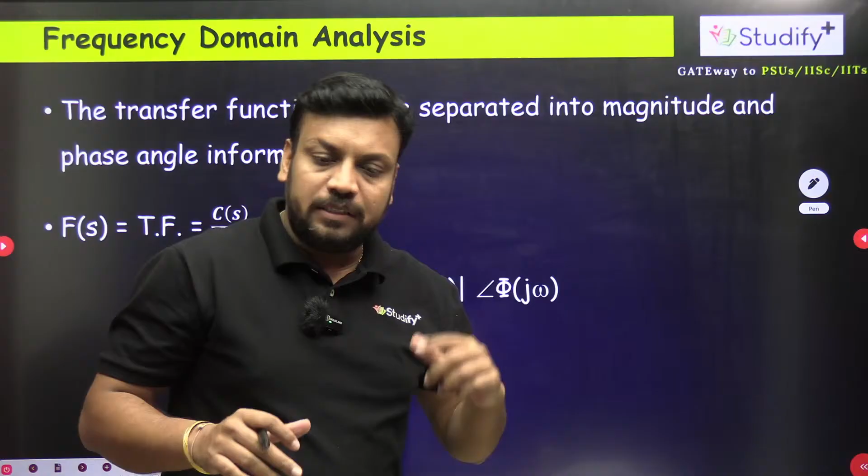So guys, let's start today's class. First of all, tell me if you attended the last class. Just let me know. What was the last slide of last class, guys?

Okay, I think all these questions we already completed. You can just confirm which was the last slide of last class. In the last class we had a discussion on resonant peak and resonant frequency, bandwidth, cutoff frequency. So all these slides we already completed till the last class. I think we solved this, this was the last question of the last slide, the last slide of the last class.

Okay, so today's class we are going to start with this GATE problem, not even engineering services, IES problem.

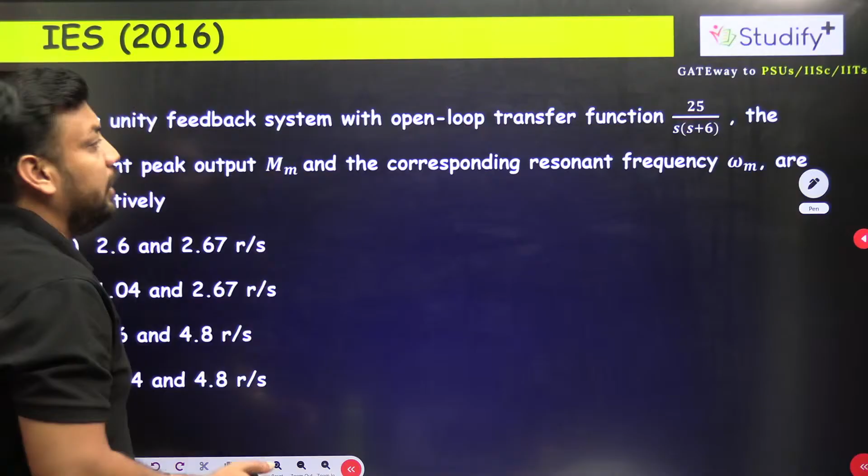And we have solved many GATE problems in yesterday's class. Now student, we derived the resonant peak and resonant frequency formula first in yesterday's class, and after that we solved some problems also. So this question is also based on the same concept.

A unity negative feedback system, it means here H of s equal to 1, and the transfer function is this. The examiner is asking for resonant peak, actually it is Mr, okay, typing error here, and this is omega r, not omega m, respectively. It means a simple formula based question, a straightforward question. The examiner is directly asking for omega r and Mr only.

So first of all, can we write the characteristic equation? The characteristic equation we can easily write because of the unity feedback system. The actual characteristic equation is 1 plus G of s H of s equal to 0. This is the actual characteristic equation.

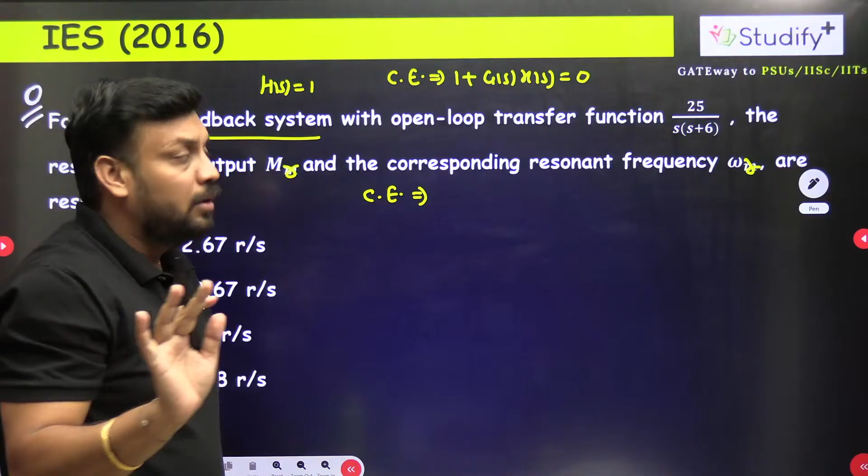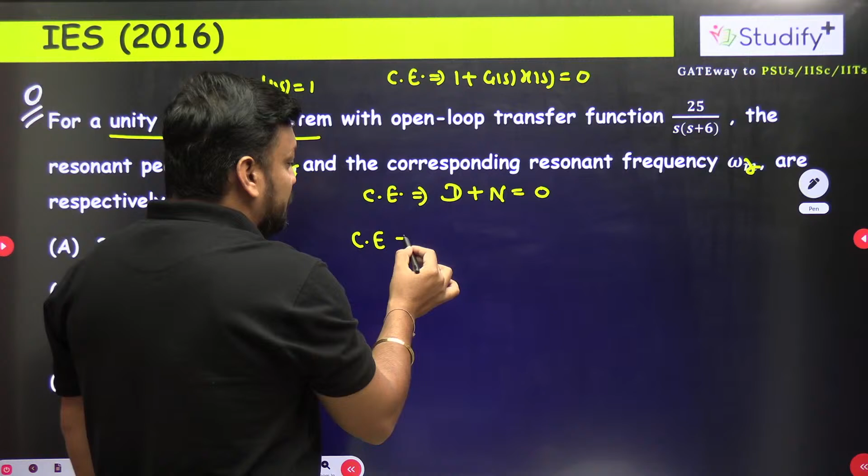But whenever we have a unity feedback, we have an advantage, and we can directly write D plus N equal to 0. Tell me guys, once you do D plus N, don't you think you will get s square plus 6s plus 25 equal to 0? Yes or no, guys?

And if you compare with the standard equation, which is nothing but s square plus twice zeta omega n s plus omega n square, once you compare with the standard equation, don't you think you will get omega n value 5 only? After comparing these two equations, you should write twice zeta omega n equal to the 2 coefficient here, the s coefficient is 6.

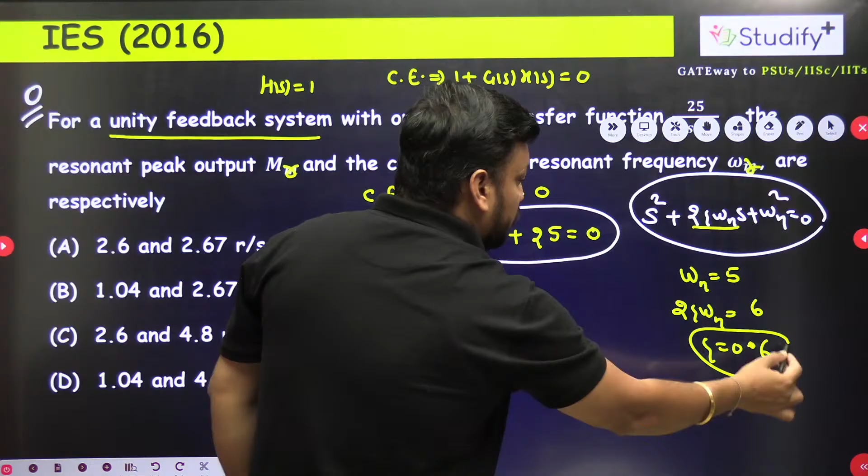Substitute the value of omega n, 5, to get 10. So don't you think zeta value is 0.6 only? Zeta value is 6 by 10, 6 by 10, sir.

Now we have omega n also, now we have zeta also. And do you know the MR formula? What is the MR formula, guys?

So here when you will write the overall closed loop transfer function, tell me Mithun, if I write closed loop transfer function as N upon D plus N, should I get 25 upon s square plus 6s plus 25?

Tell me Mithun, other students should also reply. What is the DC gain of this CLTF? DC gain of CLTF is 1 only.

It means the resonant peak formula shall be written as 1 upon twice zeta root of 1 minus zeta square. This is the only MR formula we need to apply here, and we already have zeta value. So once you put it in, you will get MR equal to 1 upon twice into zeta, zeta is 0.6, under root of 1 minus 0.6 whole square.

Just do some calculation, guys. I think once you calculate, you should get MR near to 1.04. Can you please confirm after calculation you are getting this or not? Just use the calculator, square it, then take the root, multiply with 0.6 and 2. Tell me what is the final answer. I think 1.04 something you will get.

It means two options we can eliminate here, A and C, either B correct or D correct. First confirm this, are you getting MR or not? Then after that we'll find omega R also.

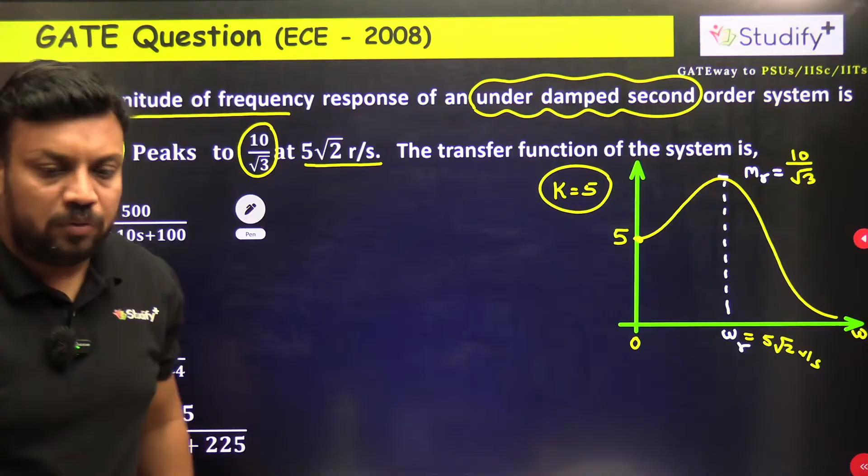And because of this, your MR formula is what? Your MR formula in general is 1 upon twice zeta root of 1 minus zeta square. This formula is only valid if provided K value is 1. But this time K value is 5. So the formula should look like this. So MR formula for this particular question will be 5 upon twice zeta root of 1 minus zeta square.

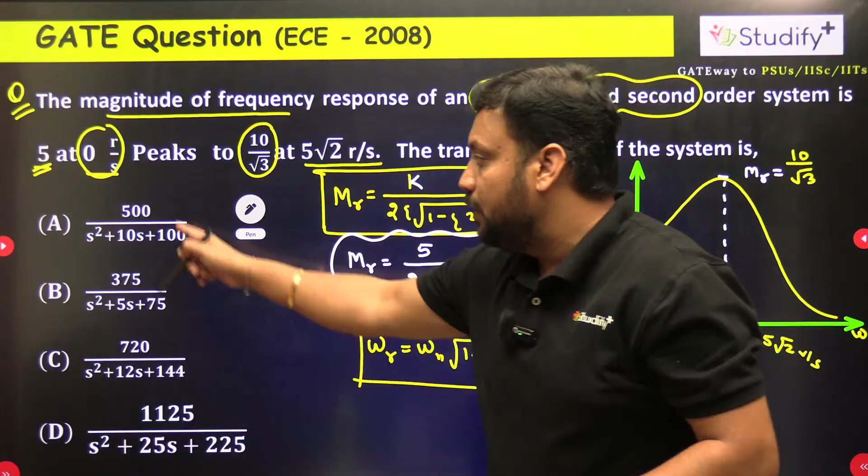Now students, we need to choose one option out of 4 which satisfies MR and omega R value, because by observing the options we can easily compare zeta and omega n. We can compare this with the standard transfer function to find zeta and omega n, and for which option zeta and omega n satisfy the MR and omega R value which is given to us: 10/√3, 5√2, that particular option is correct.

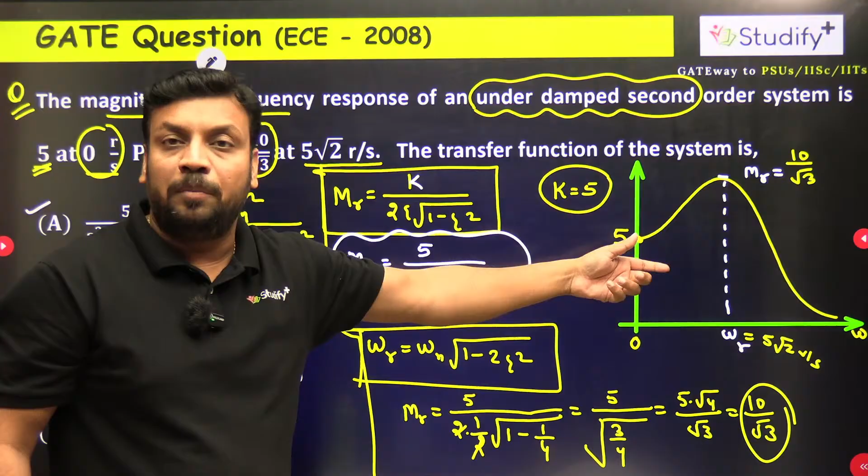So far we have only checked MR. By the way, these zeta and omega n values gave us 10/√3 as MR. It means when I compare zeta and omega n values with option A, and if I put this value in the formula, I get exactly the MR which is given to us. It means option A satisfies MR. If option A also satisfies omega R, then for sure option A is correct only.

Is it clear? Now let me check omega R also. I will use the next slide for omega R calculation. So omega R value is nothing but omega n times root of 1 minus twice zeta square.

Do you know what is omega n? Omega n is 10, and root of 1 minus twice zeta square, where zeta is 1/2, so zeta square is 1/4. So omega R is 10 into root of 1 minus 2 into 1/4, which gives 1/2. So 1 minus half is half only. So we write 10 into root of half. If I multiply and divide by root 2, it becomes 10 upon root 2 into root 2, which gives 10 divided by root 2, so it will be 5 root 2.

Is this 5 root 2 correct, guys? So omega R value is nothing but 5 root 2. Because by comparing option A, we got some zeta value and some omega n value, and by using those zeta and omega n values, we are getting exactly MR and omega R same as given by the examiner.

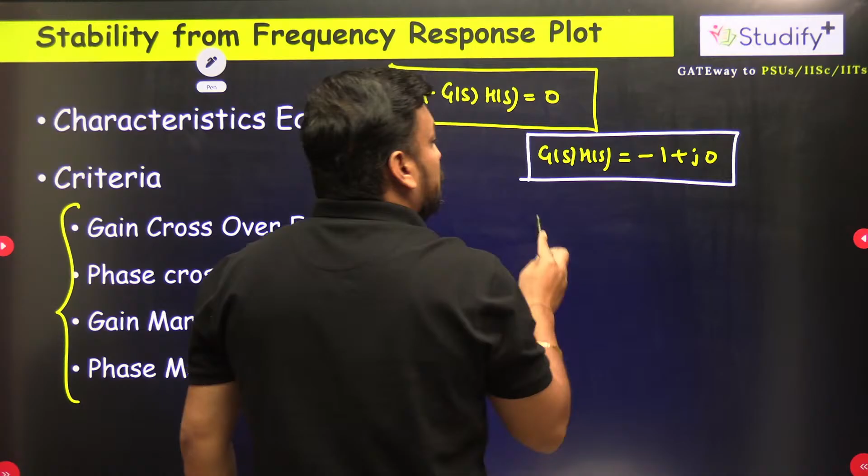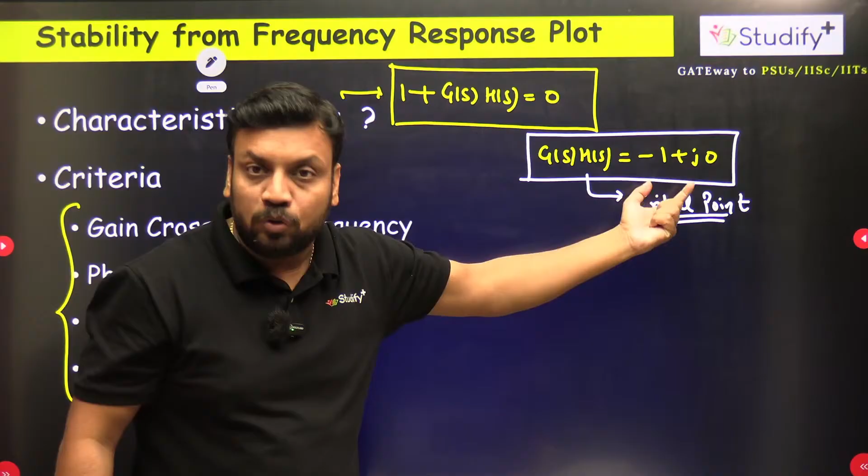Don't you think this point is nothing but a critical point only? Yes, -1 plus J0 is the critical point. Remember this: GSHS equal to -1 plus J0 is working as a critical point. When we discuss polar plot, Nyquist plot, we always need to refer to this point as a critical point, and we will find the stability of a closed loop system using gain margin or phase margin, using polar plot, Nyquist plot, with respect to this critical point, which is -1 plus J0.

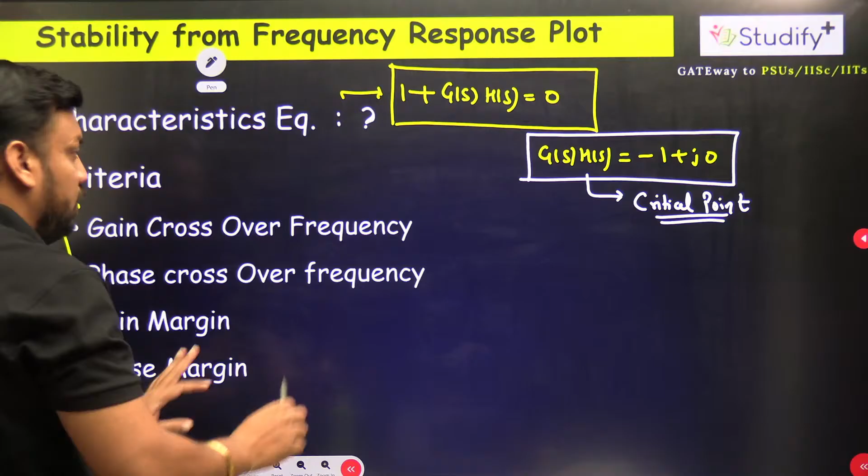Note down fast. Now students, we will write one by one. I think this is completed parallelly. Only 2 equations you need to write, so I am going to the next slide. Still, if you want, you can just write it. Otherwise, I think it is okay.

So now the first statement you should write is gain crossover frequency, which is nothing but omega GC. So you should write a statement here: it is a frequency at which the magnitude, at which the mode of GSHS.

We all know that in the frequency domain the first step is always S equal to J omega. So the magnitude of GJ omega HJ omega is equal to 1, or if you wish to find dB of 1, how do we find dB? We find dB as 20 log 10 of 1, you will get 0 dB. So you should write 1 or 0 dB.

So by definition we can write the gain crossover frequency, omega GC, is nothing but a frequency at which the mode of GSHS or mode of GJ omega HJ omega is equal to 1. As an equation, we write: mode of GSHS, or mode of GJ omega HJ omega at omega equal to omega GC, is equal to 1. This box is important, this is a very important formula. In easy language, omega GC is the frequency where mode of GSHS becomes 1, it is a frequency at which the magnitude of GSHS or mode of GJ omega HJ omega is equal to 1.

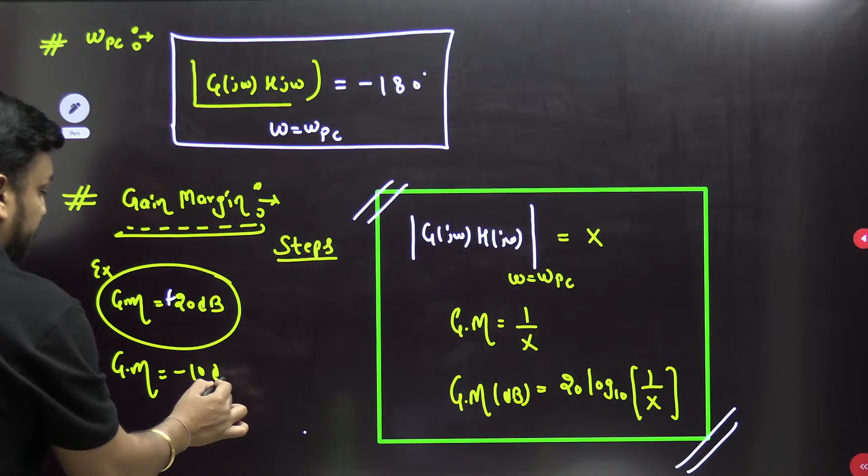Now if the gain margin is minus 10 dB, then our language is: 10 dB gain variations are needed to achieve the stability, or to gain the stability. So whenever the gain margin in dB is positive, the system is stable, and whenever the gain margin in dB is negative, the system is unstable. By default we are talking about the closed loop system, because all the parameters GM, PM, omega GC, omega PC are defining the stability of a closed loop system. So if the gain margin is minus 10 dB, 10 dB gain variations are required to achieve the stability. And if the gain margin is 0 dB, this is the case of marginally stable.

Now suppose we have a system with gain margin 20 dB. After that, the gain margin decreases from 20 dB to 15 dB, then 10 dB, then 5 dB, then 2 dB, then 0 dB. Don't you think the relative stability is going to decrease? If gain margin was 20 dB first, the system was relatively more stable, then when it became 10 dB, it became relatively less stable. Are you getting my point? So if the gain margin is decreasing, the relative stability is also decreasing. Once the gain margin is zero, it's marginally stable, and once negative, the system will become unstable. The closed loop system will become unstable only.

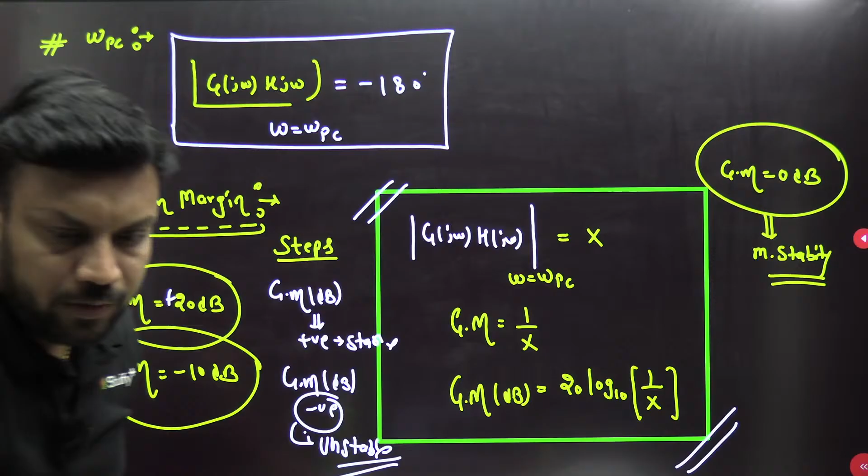Now we should write the next topic, that is phase margin. Note down fast, phase margin.

To write here, it is a parameter which measures - again the definition is the same, only the gain variation has changed to phase variation and omega PC has changed to omega GC. So now we are writing about phase margin. It is a parameter that measures how much relative phase variations are needed to lose the stability at omega GC.

It is a parameter that measures how much relative phase variations are needed at omega GC - omega GC meaning gain crossover frequency - to lose the stability.

To find the phase margin, we have to follow 3 steps. The first step is we have to find the angle of G(jω)H(jω). At omega equal to omega GC will give you phi, and the phase margin is nothing but 180 degree plus phi.

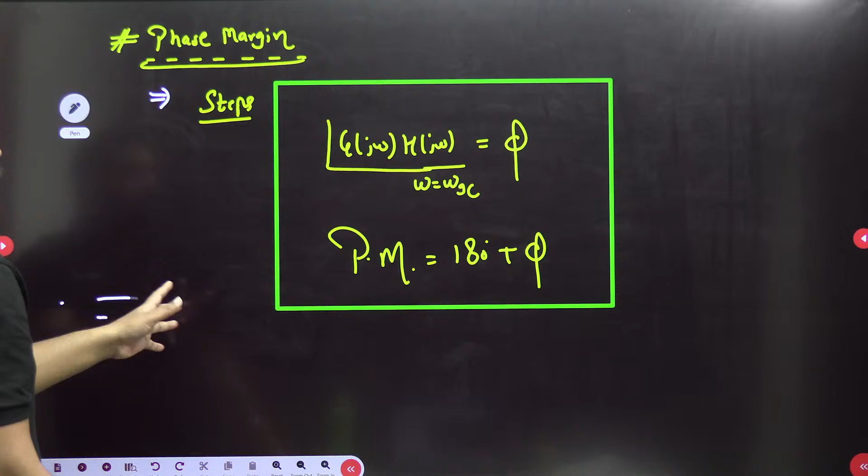So now student, we will follow this, but before that we will make this table. What is the agenda to make this table? Why do we want to make this table here? Because whenever any statement question will come, we will prove this table when I start the polar plot. When we discuss the Bode plot, then we will prove this table as well. But whatever we noted till now, for the closed loop system to be stable, gain margin and phase margin must be positive.

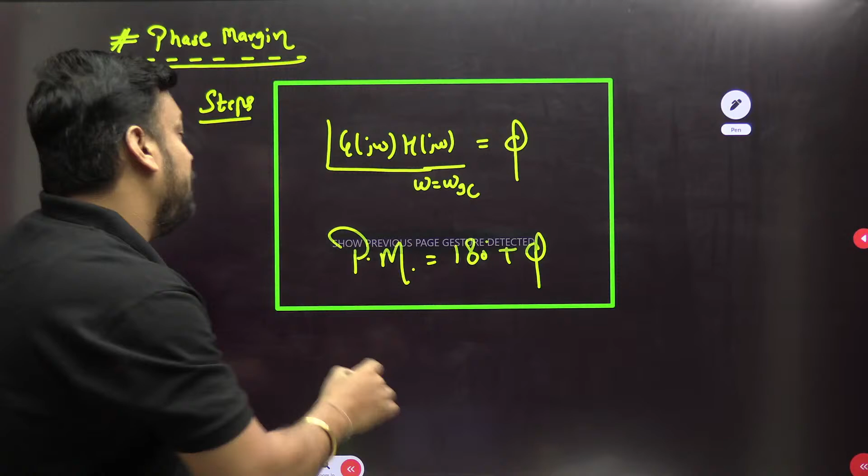So if I talk about the phase margin definition again, suppose the phase margin is 30 degree, it means 30-degree phase variations are needed to lose the stability. It means as of now my system is stable, and after 30-degree variation my system will become unstable.

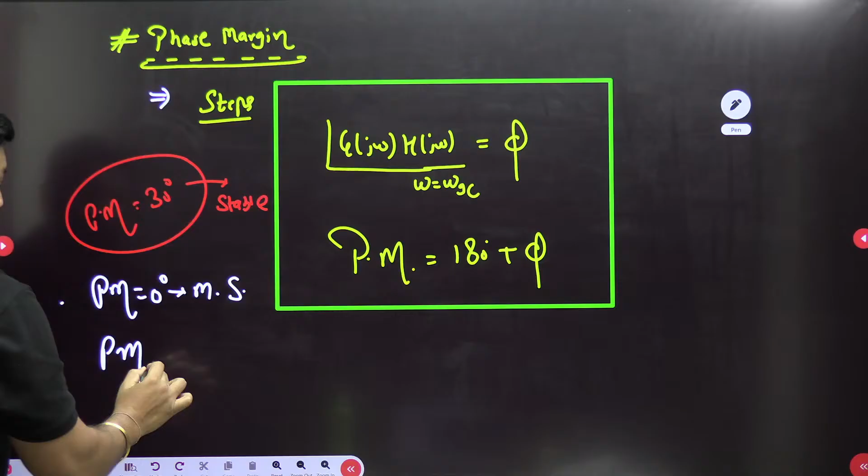It means if my phase margin is decreasing from 30 degree, then 20 degree, then 10 degree, 5 degree, 0 degree, then actually my relative stability is going to decrease. My system's relative stability is decreasing, and once the phase margin - right now the closed loop system is stable only - once the phase margin is 0 degree, the system is marginally stable only, and once the phase margin is, suppose, minus 10 degree, then it will make the system unstable. I hope it is clear.

So GM and PM are the parameters which help us define the stability of a closed loop system. Is this clear? Again there seems to be a stuck, I think.

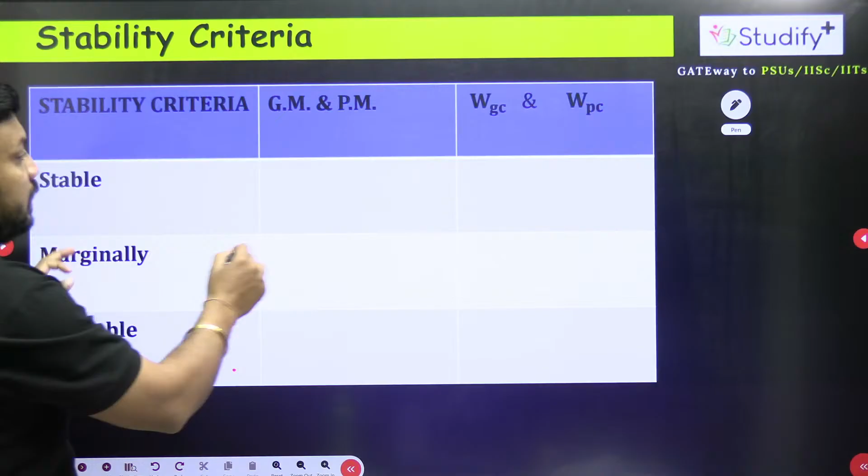Clear? So I think you noted all the 4 parameters. Now we should go for the table. So to make the system stable, gain margin and phase margin must be positive.

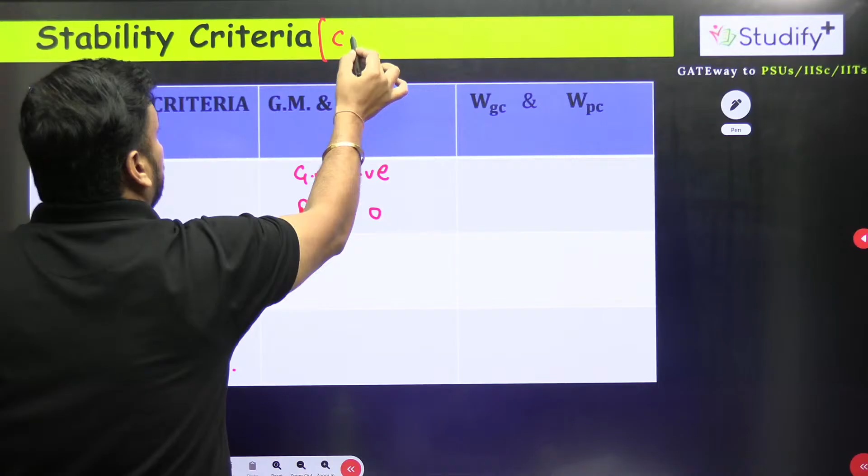Gain margin and phase margin must be positive, and when we talk about this, we are always talking about the closed loop stability criteria for the closed loop system. And this table is true only if it is provided that the OLTF G(s) - the open loop transfer function G(s) - is stable. Stable means the open loop transfer function poles must be in the LHS. So we are assuming that the open loop transfer function is stable.

So this table will give you the stability of a closed loop system. If the gain margin and phase margin are both positive - it is in dB and it is in degree - then we can say that omega GC must be less than omega PC, and it will make the system stable only.

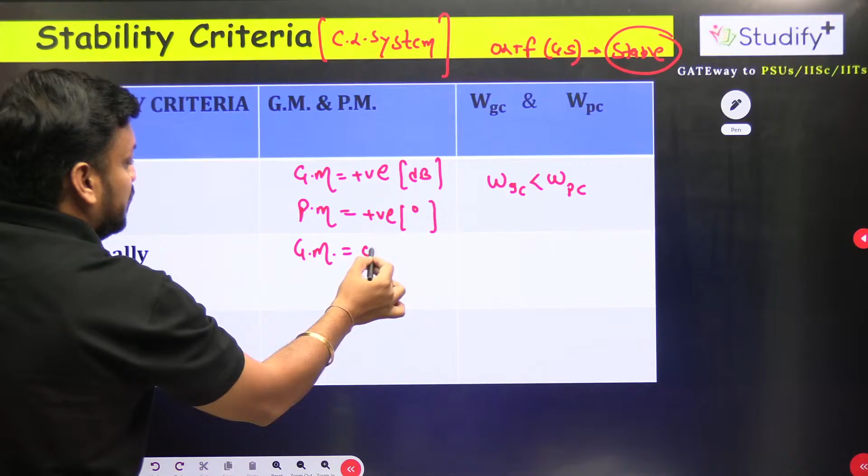Yes sir. If we talk about the system being marginally stable, then the gain margin must be 0 dB and the phase margin must be 0 degree. So gain margin 0 dB, phase margin 0 degree.

It means your omega GC must be equal to omega PC. And if I talk about system unstable, then your GM must be negative or your PM must be negative. So GM PM negative, then your omega GC is greater than omega PC, and it will make the system unstable.

This last column we are writing, omega GC and PC relation, that we will prove. This complete table I will prove when I will teach you polar plot. When I will teach you Bode plot, we will prove that, and we will hence prove this table.

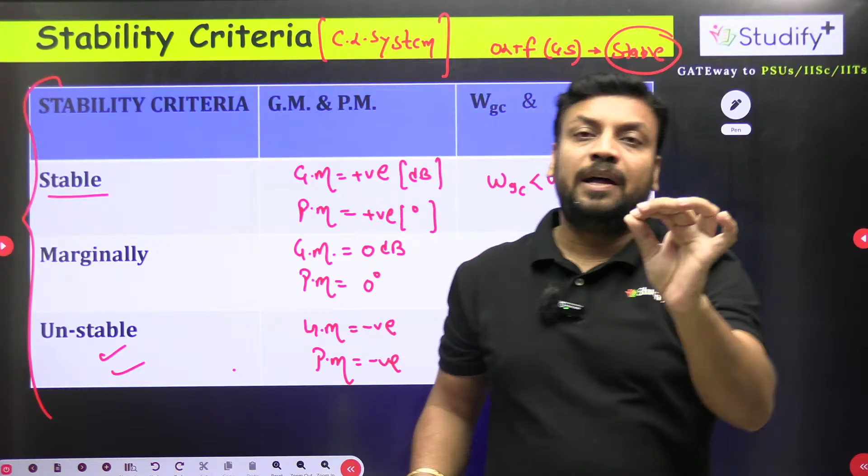Why are we discussing this table right now? Because if the statement question will come now, then you can easily identify: when GM 0, PM 0, system marginally stable; when omega GC less than omega PC, closed loop system stable; when omega GC greater than omega PC, the system is going to be unstable.

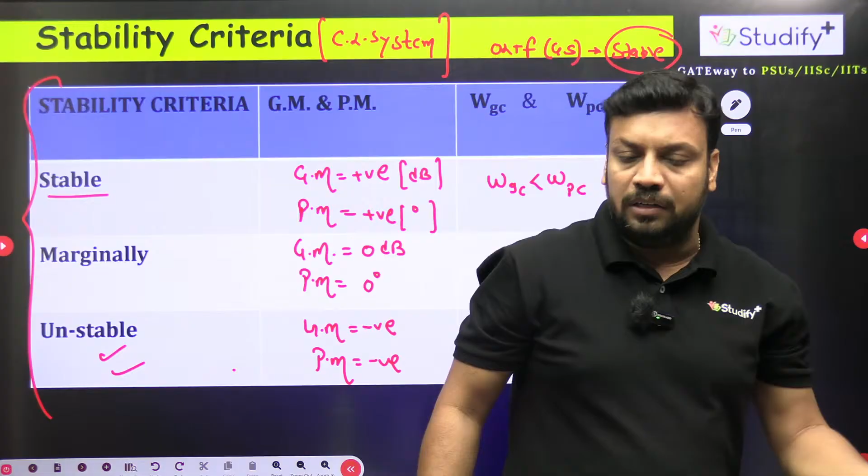Fine, absolutely fine, very good. Just complete this table part, so that we'll go for the next. We will do a small derivation for the standard second order system in this session, and after that, in the next session, we will continue the GM PM topic only. The next session will start around 9 o'clock, 9 to 10:30. Again we have the class, second session. First you should complete this, and once you will complete, you should reply fast so that we'll go for next.

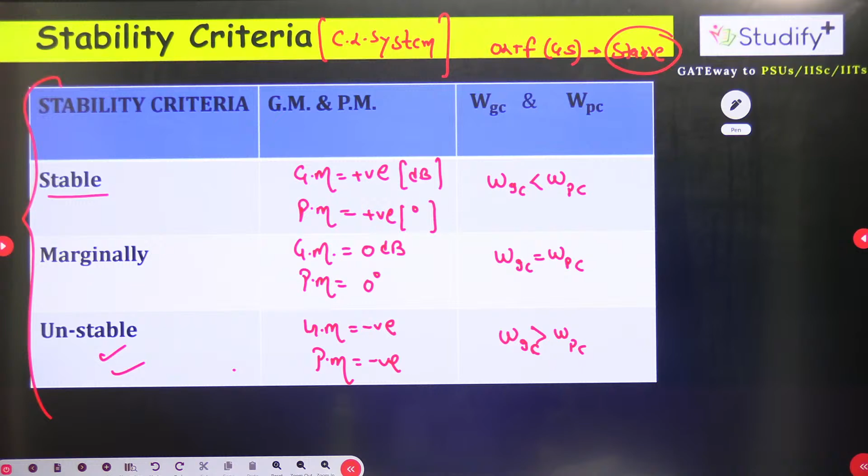Shall we go for next now? I think it is completed. So now student, make a heading. Okay, first we should solve this question.

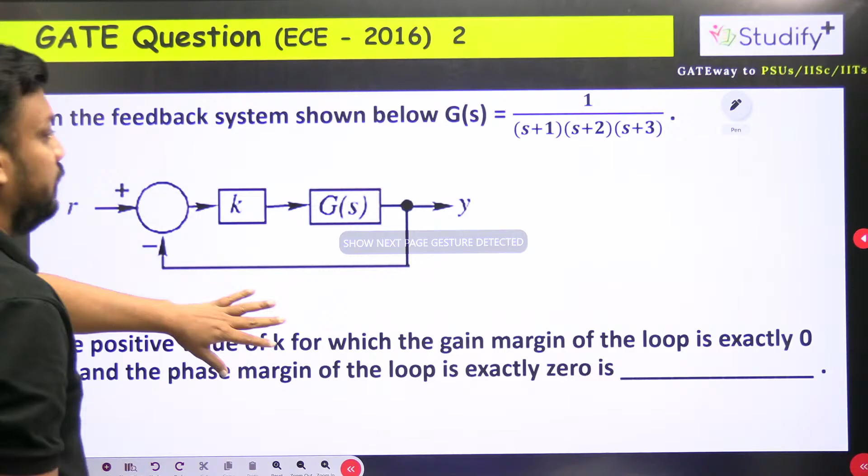In the feedback system shown below, this is my G of S value given to us, and in this diagram, once you will see K and G S here, so both should be in the cascade. What is OLTF? Don't you think your OLTF is nothing but K upon S plus 1 into S plus 2 into S plus 3.

This is your K, guys. Is it clear or not? Sorry, this is your open loop transfer function. So whenever two blocks are in cascade in the forward path, we should take multiplication, we should take the product. So here OLTF comes as K upon S plus 1, S plus 2, S plus 3.

Our examiner is asking the positive value of gain K for which the gain margin of the loop is exactly 0 dB and the phase margin of the loop is exactly 0. It means it is not a frequency domain question. Just read the question carefully.

Don't you think by observing this statement written, gain margin 0 and phase margin 0, it means the system is GM 0, PM 0, system is marginally stable, and examiner is asking for the value of gain K. Don't you think examiner is asking for Km? Examiner is asking for the value of Km. For the Km calculation, no need to use frequency domain.

Don't you think by using Routh-Hurwitz, we should write the characteristics equation, make the Routh table, and we will simply find Km. And even we can note down, sir, highest power is cube only, so no need to construct the full Routh table. We will directly use BC equal to AD, and BC equal to AD means Km we will get, and will make the system marginally stable.

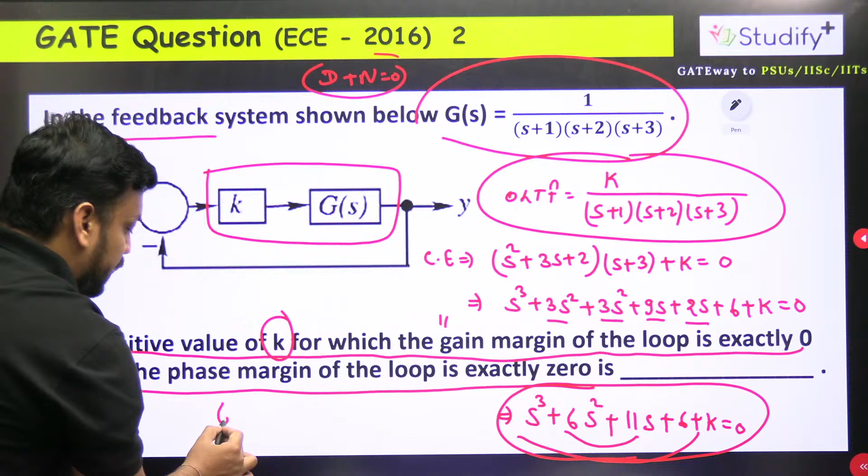Yes or no? Now tell me student, don't you think we should write BC equal to AD, means 11 into 6 is 66 equal to 6 plus K. What is K from here? Don't you think from here K equal to 60 only? This is the value of Km. Km value is the value of K which will make the closed loop pole on the imaginary axis and will make the system marginally stable.

So this means the final answer you had to type, NAT question, is 60. Correct answer 60 is coming. Shabas children, shabas, very good. I think you already replied. Very nice. So now we should go for next. Shall we go for next?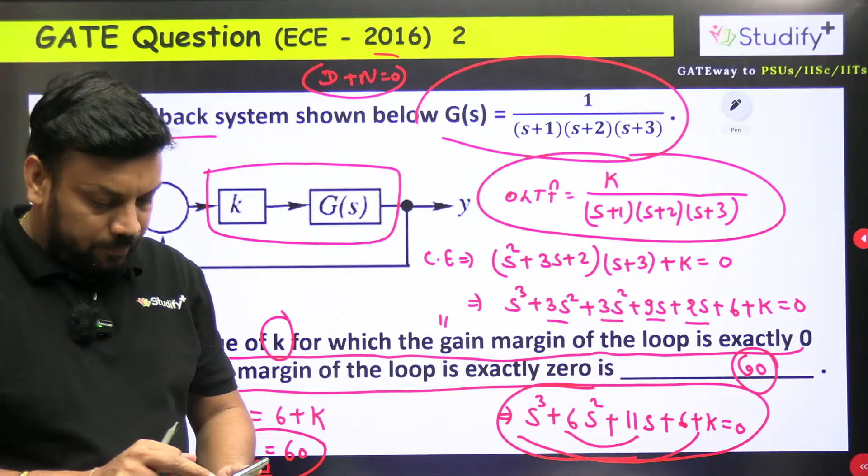Phase margin is always positive for the stable system. Is option A correct guys? Phase margin and GM must be positive to make the system stable. Is it clear or not? Yes or no?

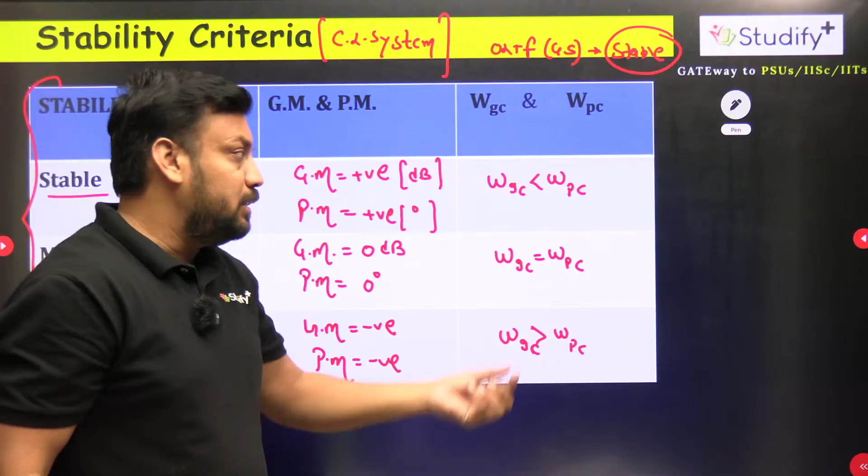The loop gain function L(s) of a control system with unity feedback - this is your open loop transfer function given to you. If the gain crossover frequency of the loop gain is less than the phase crossover frequency, it means examiner is asking omega GC less than omega PC. Whenever omega GC is less than omega PC, then only GM and PM are positive and will make the system stable.

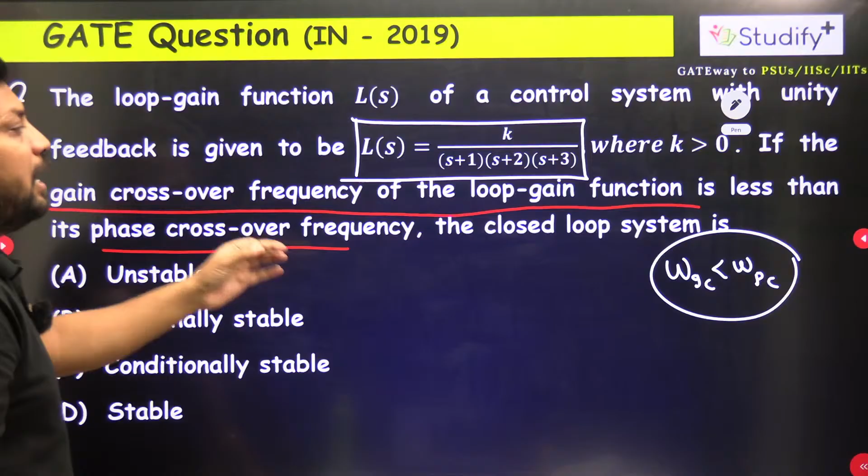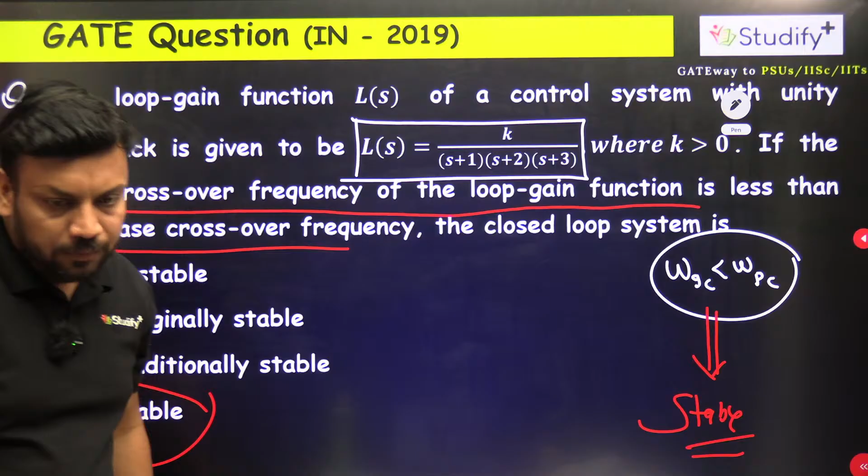Make the system stable, yes sir. It means here it is asking what the system will be, so tell me fast. If omega GC less than omega PC, this is a statement question, no need to calculate. Is the system stable? Correct answer is option D for Delhi.

The basic concept says that the GM and PM must be positive, and by default we are provided that OLTF is stable by nature - whatever GS is given, this is stable. Then only this condition is satisfied. Negative means option 3 only, guys. Tell me yes or no. To make the system unstable, the examiner is asking for unstable only. Is it clear, children? Shall we go for next or wait?

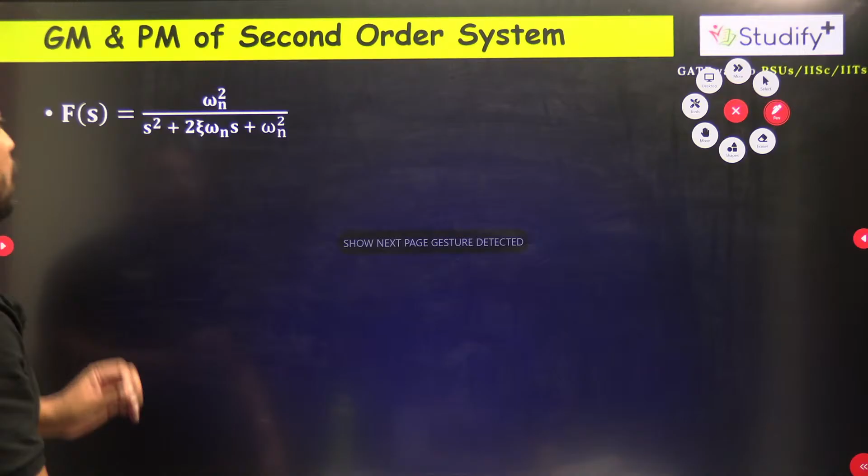So now we should go for next. Still, if you want time guys, you can reply so that I will show you the last slide again.

Now just make a heading: GM and PM for a second order system. I want here some extra slides, so we'll add here an extra slide, no problem. First of all, student, I will make this your standard second order system closed loop transfer function - Standard SOS CLTF, closed loop transfer function.

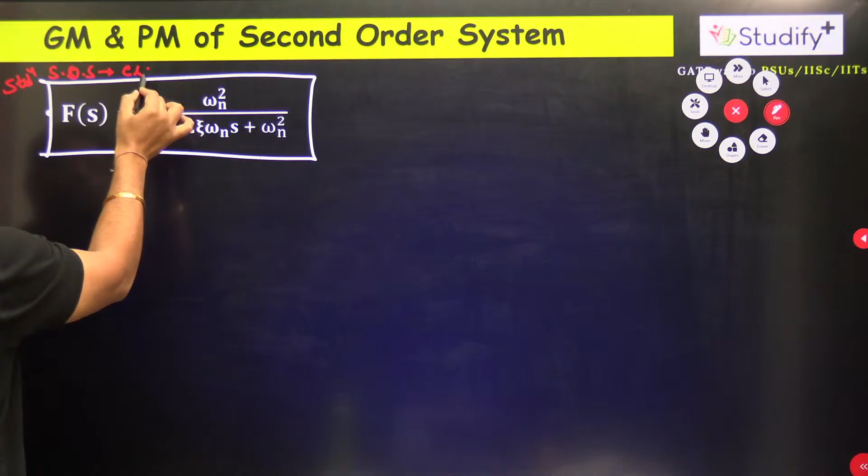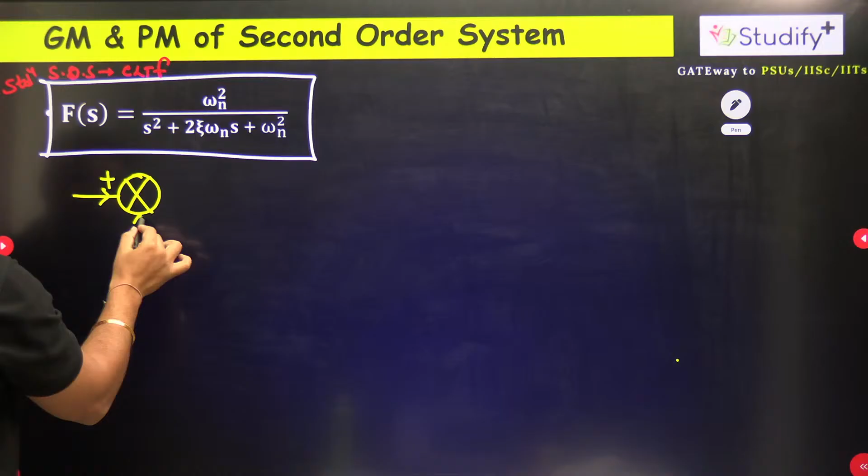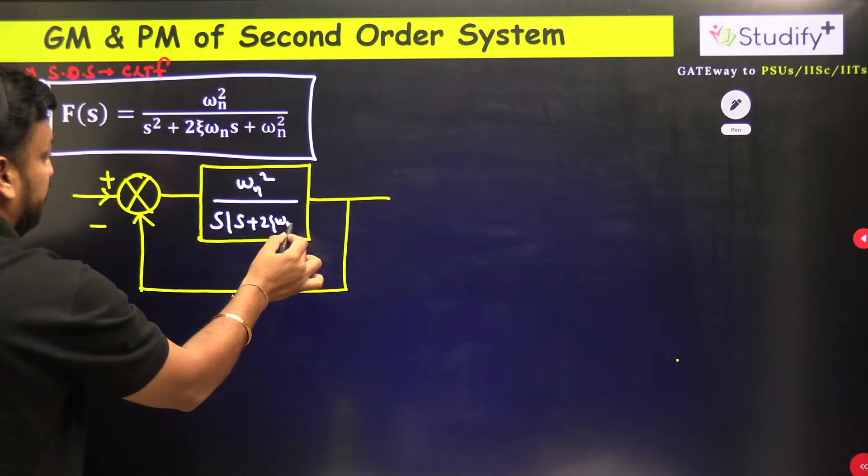Now we are looking for the GM and PM for the second order system. So I will make the closed loop system diagram first of all for you. This is my plus minus. This is my standard second order system - I will draw the standard second order system first. So we should write here omega n square upon s into s plus twice zeta omega n, and here we should write r of s, and here we should write c of s, and this is nothing but h of s equal to 1, which is given to us.

Now student, tell me what is g of s, h of s here. So g of s h of s is nothing but omega n square upon s into s plus twice zeta omega n. We will do a small derivation.

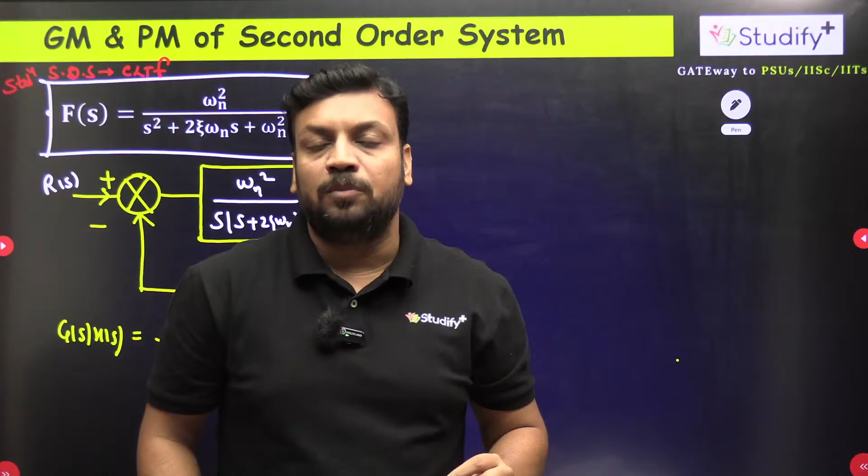As far as GM PM calculation is concerned, we always need to follow 3 steps for every question. Whichever GM PM question comes, first you need to write down the 3 steps. Right now also we want to find GM PM. So for the second order system, standard second order system, we will do a small derivation, and in the derivation also we should follow the 3 steps. What is the first step? The first step is always s equal to j omega.

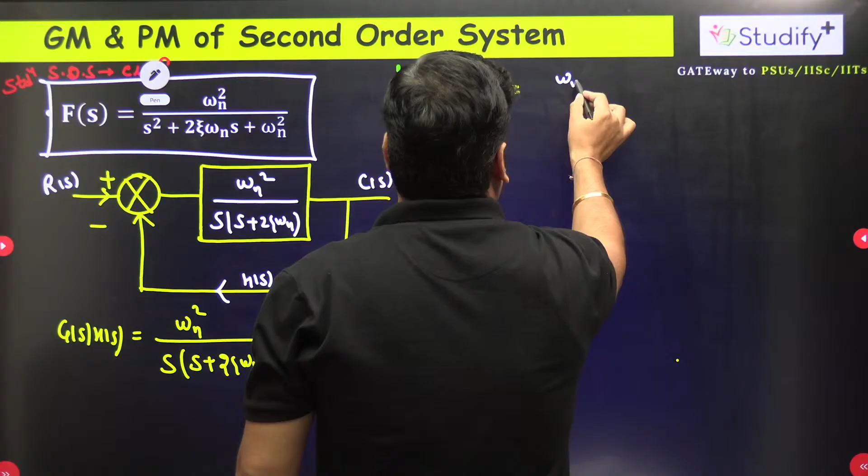Substitute j omega in the transfer function. So if I write step number 1, that is GJ omega HJ omega. Here in this transfer function, wherever there is s, you need to put s equal to j omega. So in place of s, we write omega n square upon j omega plus twice zeta omega n. Is this clear? Is this my equation number 1?

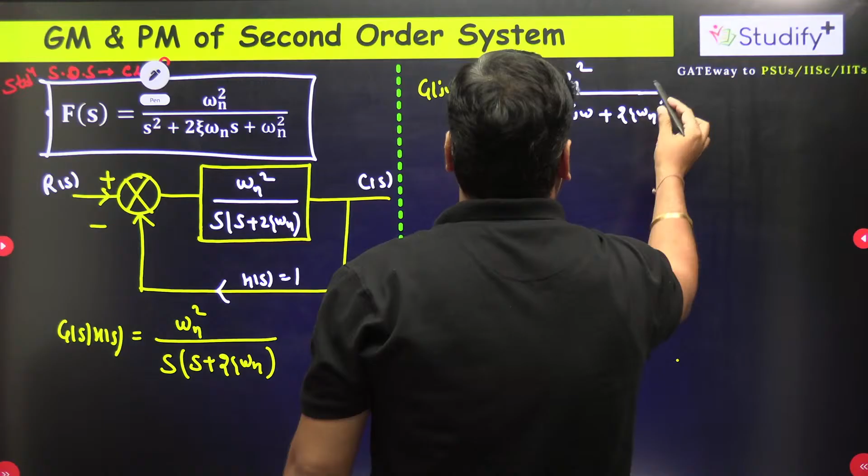Now next is the magnitude of GJ omega and HJ omega. What is the magnitude? The numerator magnitude is omega n square only upon omega, and under root of imaginary part square plus real part square, it should be omega square plus 4 zeta square omega n square. Is this equation number 2, guys? Simply we calculated the magnitude only, yes.

Now tell me, what is the angle of GJ omega? The angle of GJ omega HJ omega is nothing but the angle of numerator 0. The angle of j omega is minus 90 degree. Here the angle of j omega is 90, but when it shifts to the numerator, it becomes minus 90. What is the angle of j omega plus this term? The angle is tan inverse omega upon 2 zeta omega n, and when you shift this angle to the numerator, the sign changes. So we write minus tan inverse of imaginary upon real, that is omega upon twice zeta omega n. This is equation number 3 only.

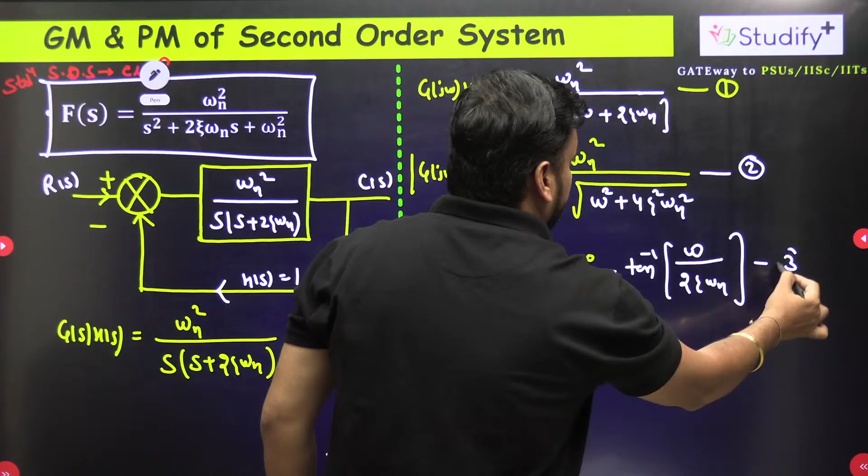So as far as GM, PM, any calculation is concerned, we should always follow these 3 steps by default.

तो ये 3 स्टेप तो आपको लिखना ही है, हमने लिख दिया सर फटाफट से, है ना. बीच बीच में आप लोग ऐसे इमोजी बना सकते हो बच्चों. आर यू गेटिंग और नॉट? यू कैन यूज द इमोजी एज वेल. तो इस तरह से इमोजी बनाने का ऑप्शन आ रहा है क्या आपको? सो दैट आई कैन एश्योर दैट यू आर गेटिंग. बोलो, इज इट क्लियर?

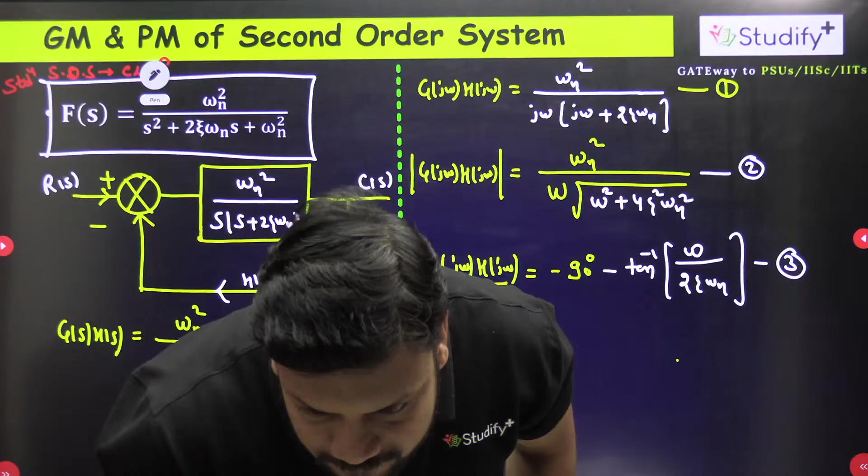So now tell me: minus 90 degree minus tan inverse omega by 2. Equation number 1, 2, 3 we noted, sir.

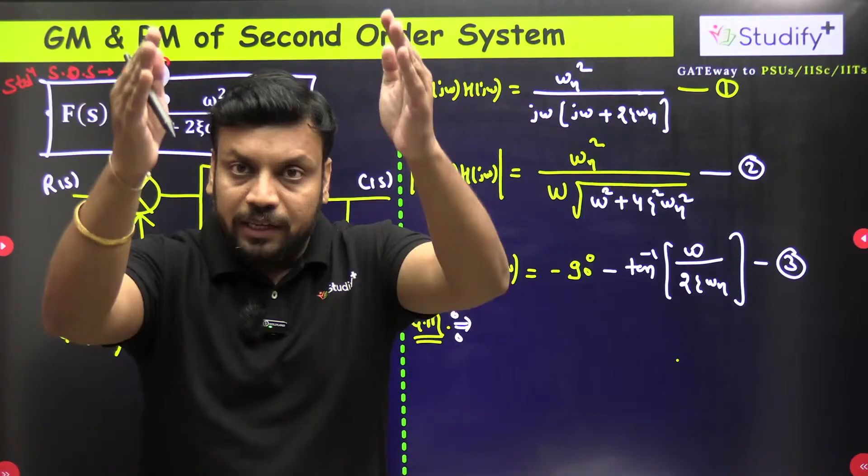Now students, don't you think before calculating, if I wish to calculate GM, then first I should have omega PC, because what is the gain margin definition? How many steps do we need to follow to find gain margin? First we should have omega PC. And what is omega PC? Omega PC is the frequency at which the angle of GJ omega becomes minus 180. Is this clear?

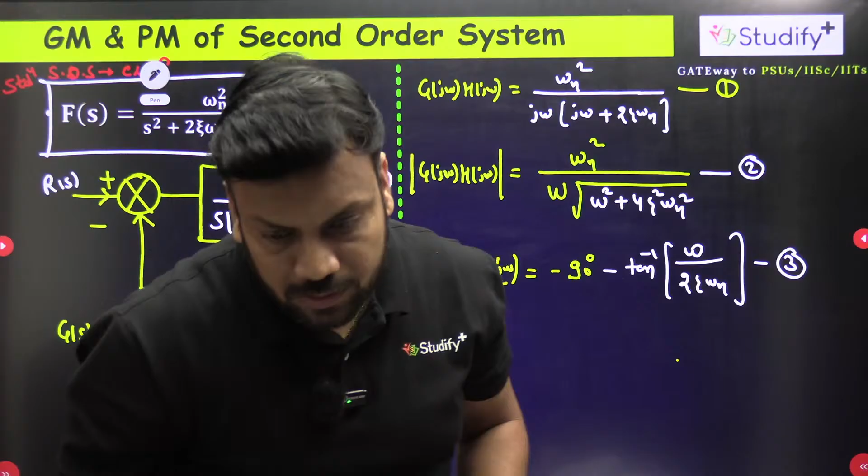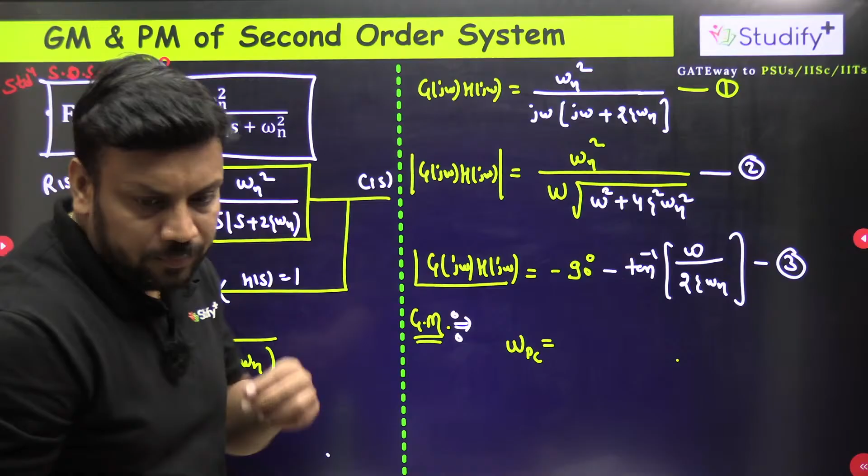Now tell me guys, if I am looking for omega PC, then omega PC is a frequency at which this angle equation should equate to minus 180 degree. Already the angle equation we have here is minus 90 degree. Now we need to choose that value of omega which will make this entire term 90 degree, because if somehow I manage to make this term 90, then minus 90 will become minus 180, and my purpose will be solved because I will get omega PC. Omega PC is a frequency at which the angle is minus 180. Are you getting this or not? Are you with me?

Now tell me, here zeta and omega n are constants, so omega is the only thing in our hand. So we need tan inverse infinity, and tan inverse infinity is 90 degrees. So that means omega PC comes out to be infinity radian per second.

Once you put omega equal to infinity here, then only this term will give you 90, and minus 90 will become minus 180, because at omega PC the angle of GJ omega HJ omega becomes minus 180 degree. So now we already got omega PC. We are clear with omega PC now.

Yes, omega PC is infinity. So we need to follow 2 steps to find gain margin. First is the magnitude of GJ omega HJ omega at omega PC, which provides us X, and gain margin is 1 by X. So first, don't you think I should do this?

So let me do it here: magnitude of GJ omega HJ omega at omega PC. What is the value of omega PC? Infinity. And where is the magnitude? Here is the magnitude equation. Is this our magnitude equation, guys? Yes, this is indeed the magnitude.

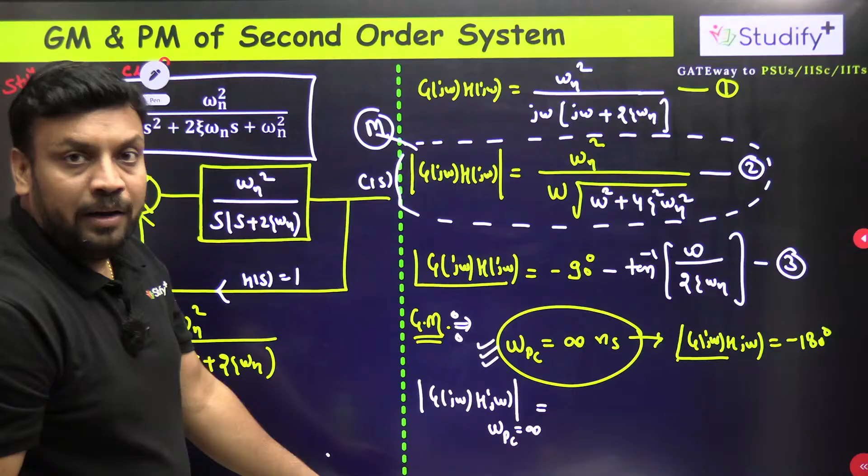In this magnitude equation, if I replace omega with omega PC, then the magnitude should be equal to X. Gain margin is 1 by X. Don't you think omega PC value is infinity here? So in place of omega, once you put infinity here, omega is dominating in denominator. So hence you put infinity into something, something upon infinity is 0. Omega n square upon infinity is 0. It means this value becomes 0 after putting infinity.

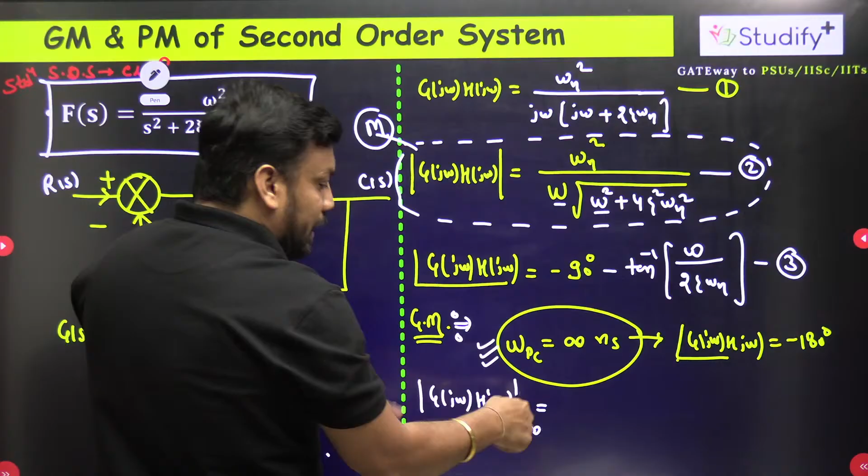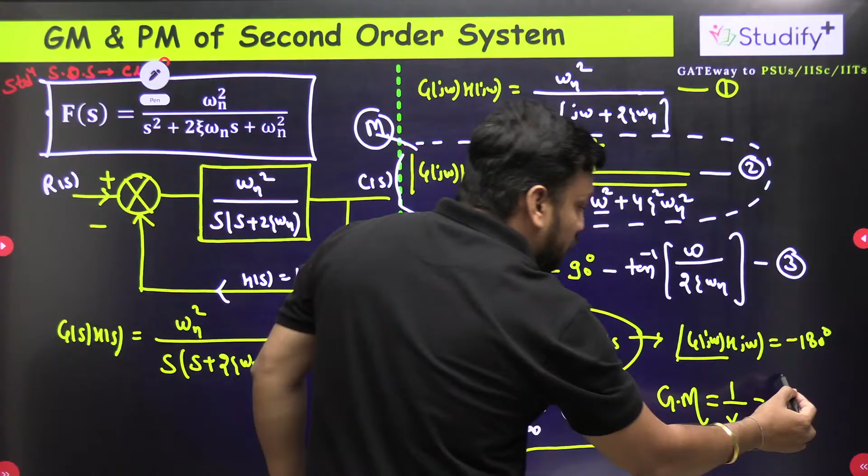And do you know guys, gain margin is nothing but 1 by X. Gain margin is 1 by X. X value is 0, so gain margin is 1 by 0. It means infinity. Is this gain margin infinity, student? Is this gain margin infinity?

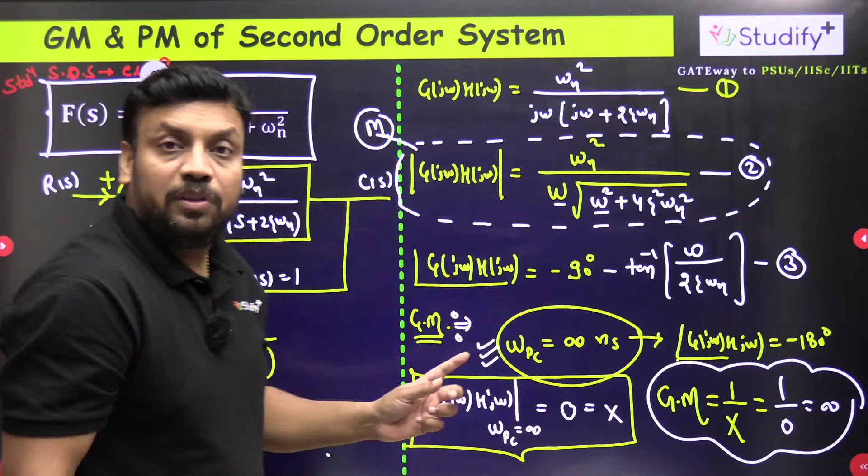This means that for the standard second order system, gain margin is always infinity. Yes, the standard second order system which will satisfy the standard omega n square term - if our second order system follows the standard equation, then the second order system's gain margin will always be infinity, and the second order system's phase crossover frequency will also be infinity. So for the standard second order system, omega PC should always be infinity and GM value should also be infinity. Gain margin value should also be infinity. I hope it is clear.

So this is your conclusion. For the second order system, the omega PC value is nothing but infinity radian per second, and we got gain margin infinity. If you take the dB value of this, 20 log infinity is nothing but infinity dB only. So gain margin is nothing but infinity, and gain margin is nothing but infinity dB also. So this is the important note for the standard second order system, the standard result you should note down.

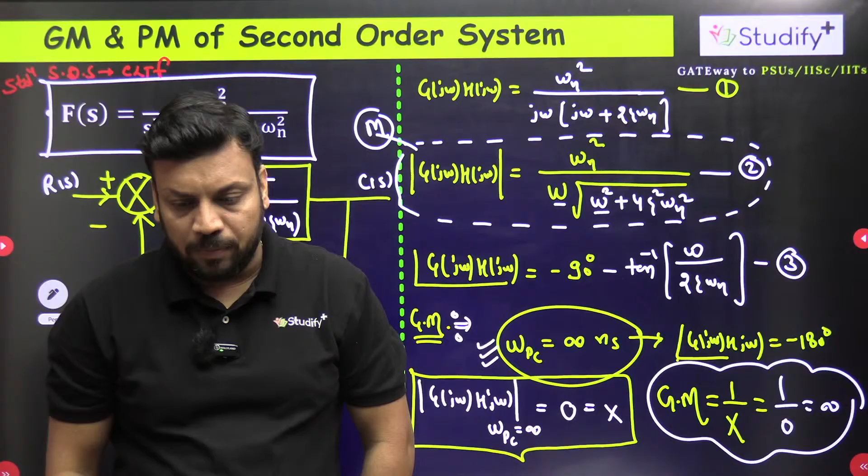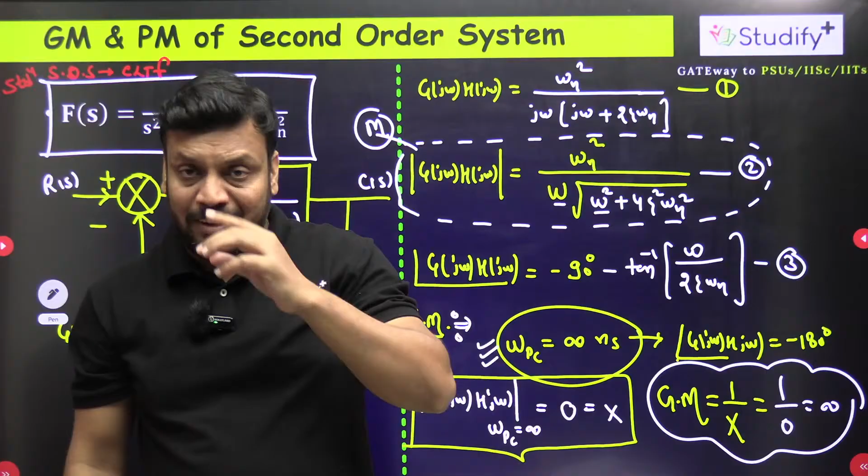Box is working. Yes, yes, so in today's class the chat box is like that. Otherwise, which would you prefer, yesterday's approach or today's approach? Tell me guys, we will conduct the next session in the same way, whatever you want. Yesterday there was some lag problem. I think the chat problem is manageable, 30 seconds you can wait. Yes, follow.